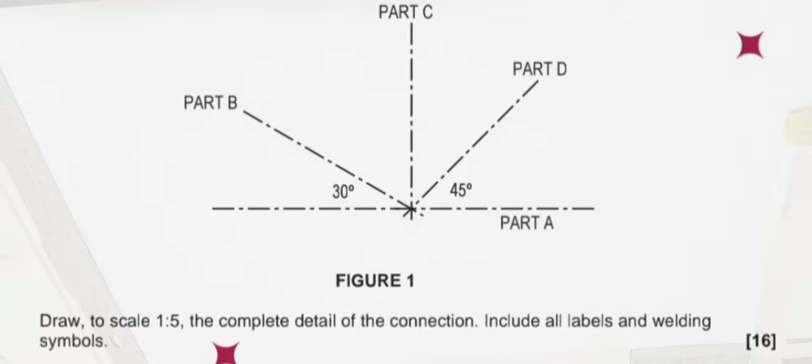So for part C, we have 70 by 70 by 8 rolled steel angles bolted to a gusset plate using 2 equally spaced M12 bolts. So there is our diagram. It's the diagram given, but then we'll have to copy it first in order for you to draw this question. So below it says draw to scale 1:5 the complete detail of the connection. Then they also said we must include labels and welding symbols.

So in this question, what you can do first is to copy that diagram as given. So let us copy our diagram. You can copy it using center lines, construction lines. So I'll start by drawing, but this line must be faint. Here I'm doing it dark so that it can be visible to you looking at the video. So for the members, they said our part A, meaning we're gonna use this line.

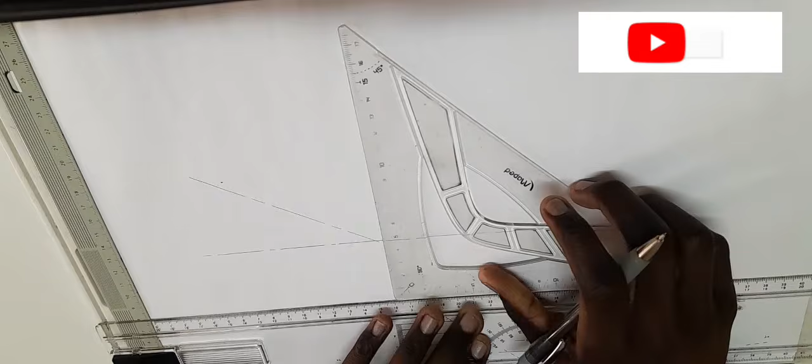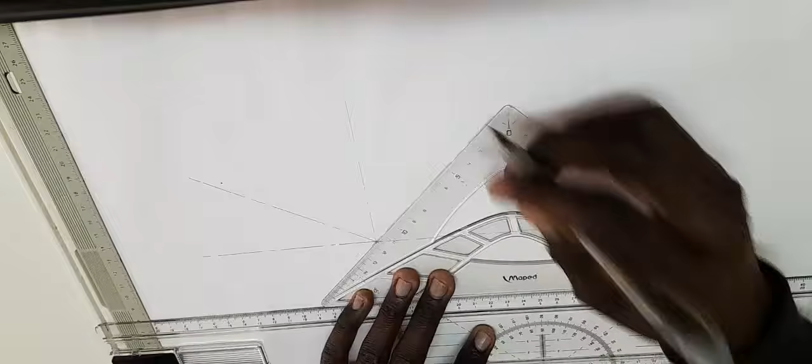So our part B, let's start with part B. They said it's 30 degrees. So take your 30-degree ruler and construct a line like this. Then for part C, it's 90 degrees. You can use a straight line. So for our part D, they said it's 45 degrees. We're going to use 45 degrees. So there we have copied our diagram.

So what will happen? We'll start by doing our part A. This is part A. It's our tie beam. So a tie beam, they said it's 100 by 100 by 10. So don't be confused about these 3 measurements given. You only use 2. Here you're gonna focus on 2 because it's one elevation, it's one view, it's a front view. But on the isometric drawing, that's where you focus on all of the measurements given. I hope you understand.

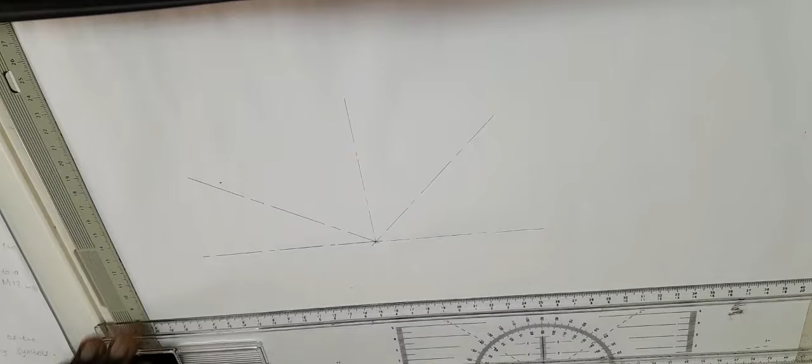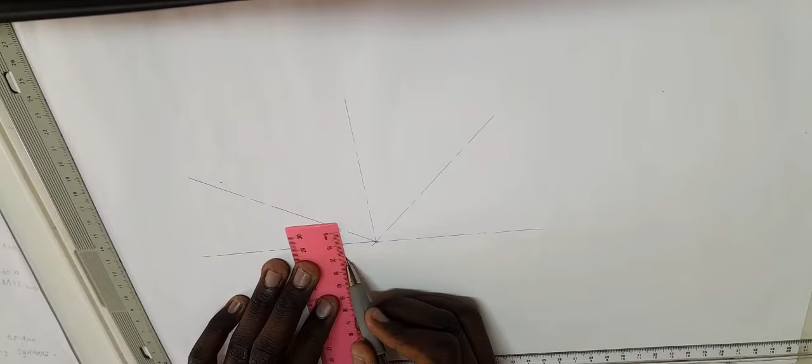So in this case, they said our part A, our tie beam is 100 by 100 by 10. So firstly, we are going to say 100 divided by 5. When you say 100 divided by 5, you get 20. Then after 20, you're going to say 20 divided by 2 because this is center line. 20 divided by 2, which is 10. So you're going to place your ruler here, measure 10 on top, measure 10 bottom. After that, in this case I'll use a different color. Construct a line like this, then come here, the bottom point, construct a line like this.

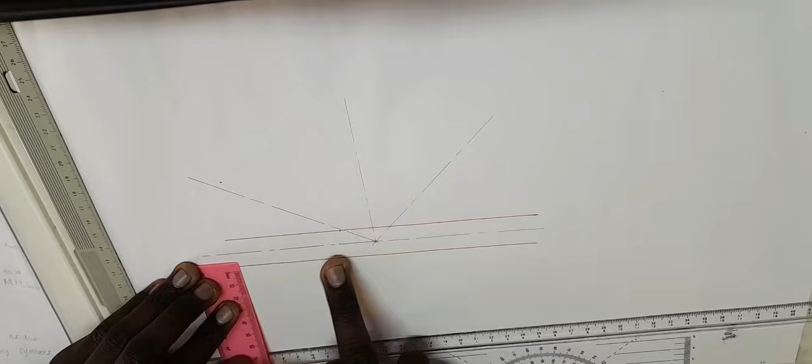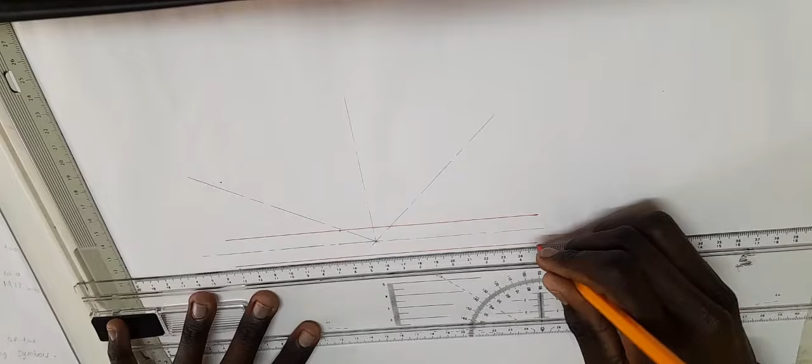Right, then they said it's 100 by 100 by 10. Now for the 10, you're gonna say 10 divided by 5, which is 2. So we're going to come here on this bottom line and measure 2 going down, 1, 2, somewhere here. So point, then after you draw another line, the double line at the bottom. Right, so after doing our part A, we can focus on our part C. You can start by any point or any part, it's up to you.

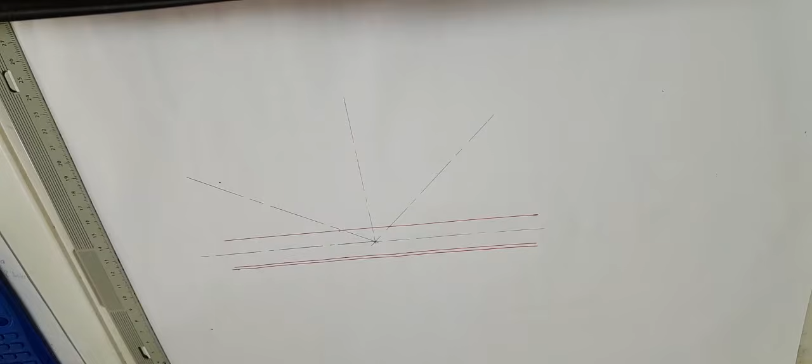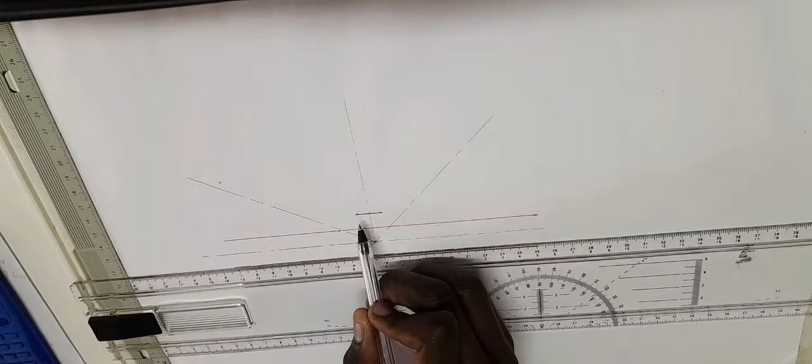So for part C, they said it's 70 by 70 by 8. We're gonna say 70 divided by 5, which is 14. Then 14 divided by 2, which is 7. So I'll come here and measure 7 this side, measure another 7 this other side. Then I'll come here, somewhere here. Then this is my 7 this side, 7 this side. So you construct it, project it to the top, going up. Project this one, project the other point like this.

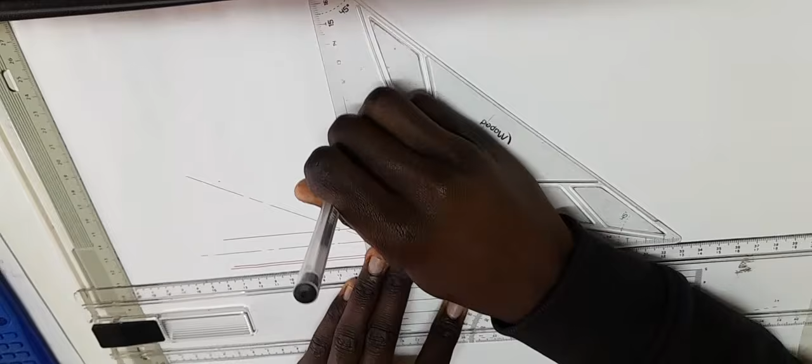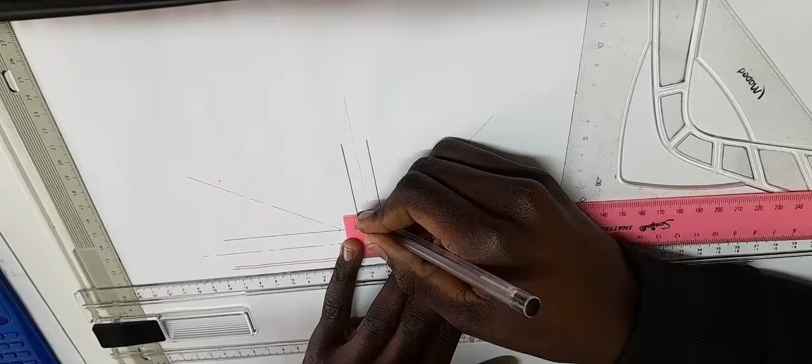They said it's 70 by 70 by 8. So you're gonna say 8 divided by 5. It gives you 1.6, which you can round off, make 2. So you can come this side and measure 2 here. Then again you construct the 2. This is our part C.

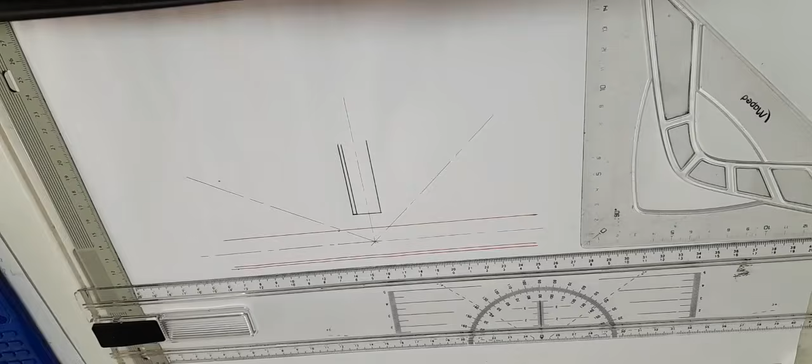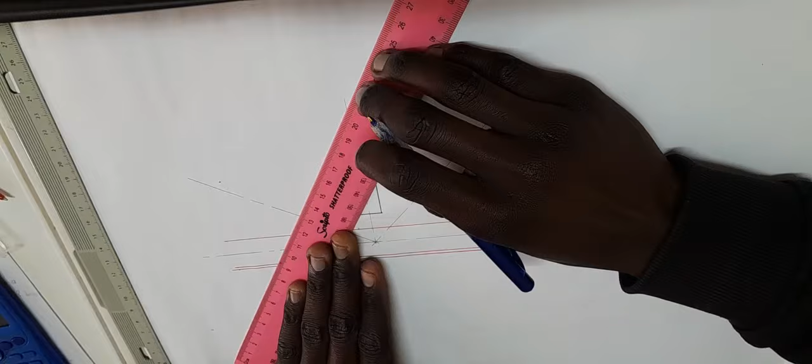For part B, they said it's 60 by 60 by 8. You can start by part B. This is our part B for 30 degrees. So for part B, they said it's 60. So you're going to say 60 divided by 5, 12. 12 divided by 2, which is 6. So I come here and measure 6 this side, again measure 6 the other side. So I'll close it here 60 degrees.

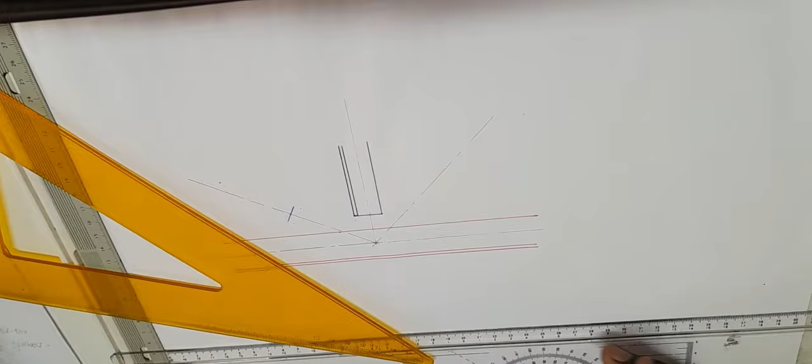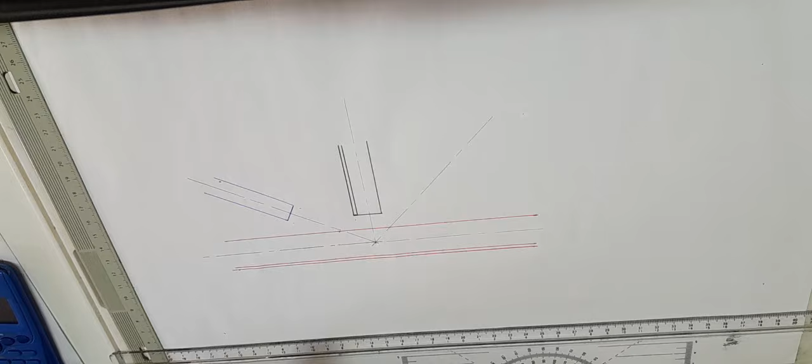Since they said this one is 30 degrees, I use 30 degrees for the points. So they said it's 60 by 60 by 8. When I say 8, again divided by 5, which is 1,6. Then we measure 1,6 here. So let me place my ruler and measure 1,6. You can round it off and measure 2. Still it's fine. 2 here. So here you go, you have

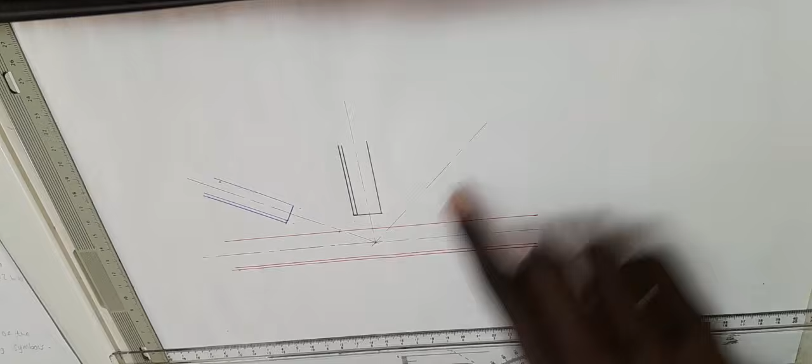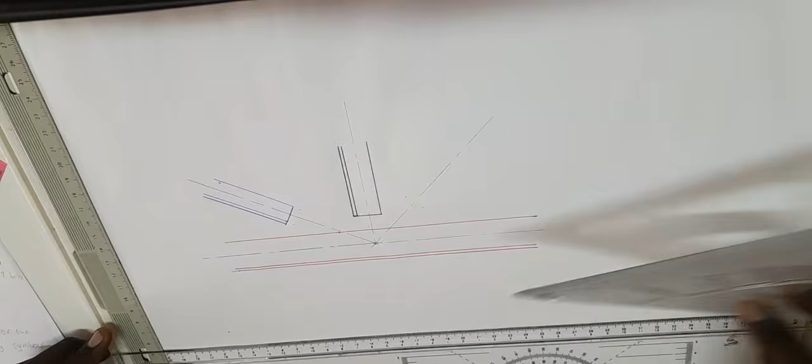part B. So for part D, they said it's 45 degrees. So meaning you're gonna come here again, and they said it's 60 by 60 by 8. So meaning this side you're gonna measure your 6, this side 6. You're gonna see 60 divided by 5, which is 12. 12 divided by 2, which is 6. So I'm gonna come this side and measure 6 and 6 this side. So on this side we will use 45 degrees.

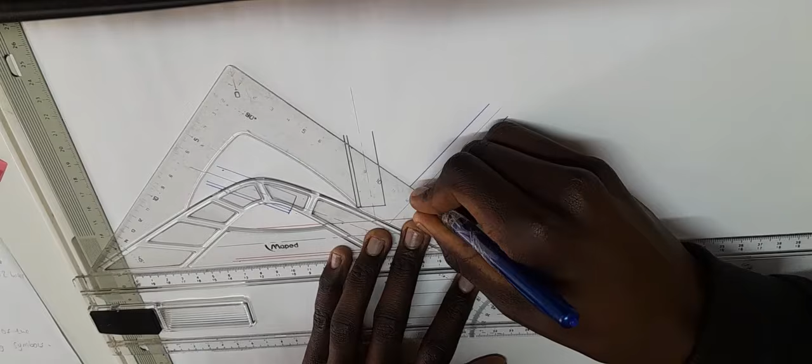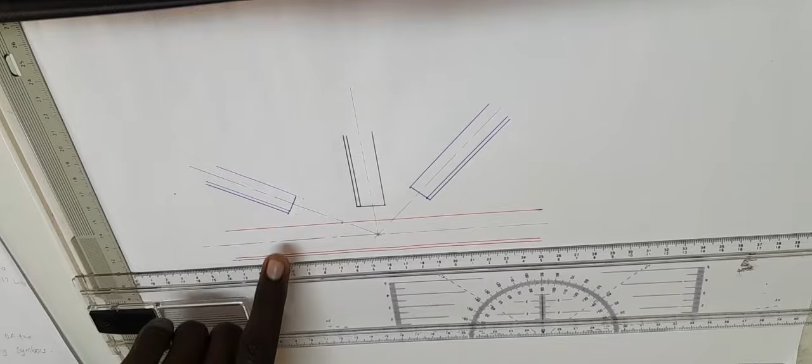So again you measure 2 here, which is here exactly. So I'm gonna do double line this side, and after this video I will draw rolled steel angles so that you can see why it has 2 lines one side. I'll show you why. I will draw this thing with a pictorial view or isometric view so that you can see why it looks like this. So here, come here and do your cracking lines to show that this member is still continuing.

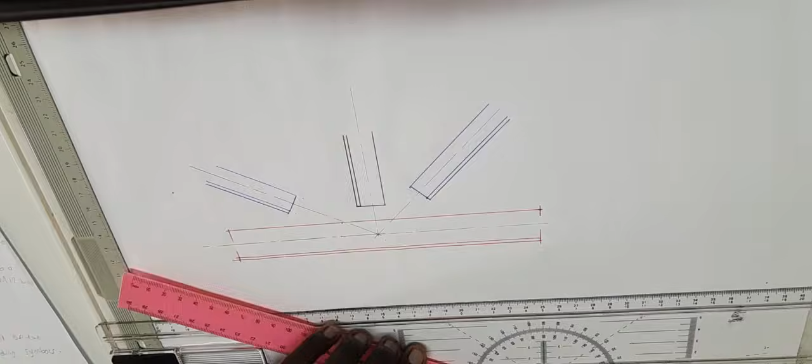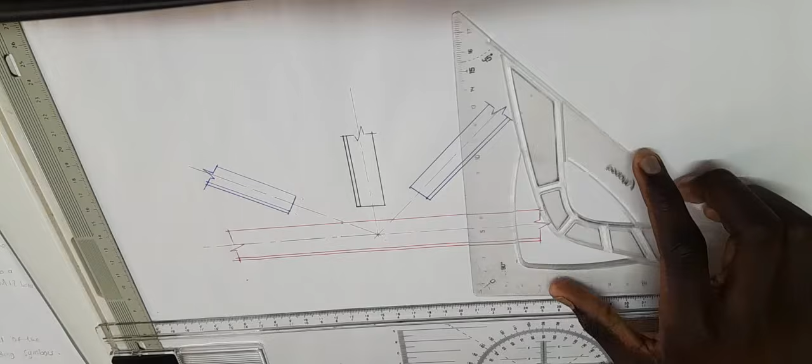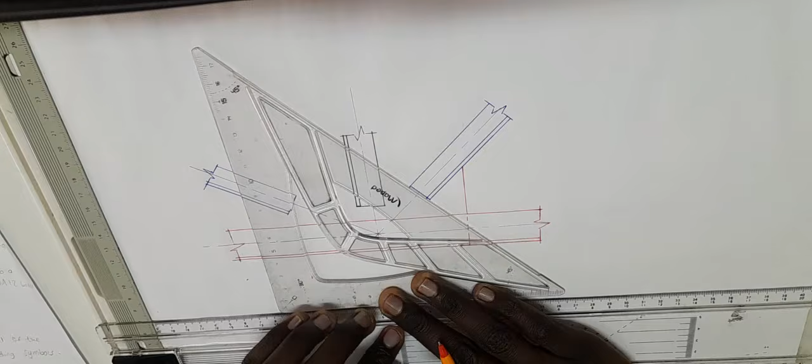Right, they said our part A, it's bolted to the gusset plate using 3 equally spaced M16 bolts. So from here, let us draw firstly our gusset plate. So for our gusset plate, we'll come here and draw a line, straight line. But then here we're going to do hidden detail to show that it is behind. Then you can come here, somewhere here, draw a straight line. Again, hidden details going down to show that it is behind. So again, you can come here and draw hidden detail.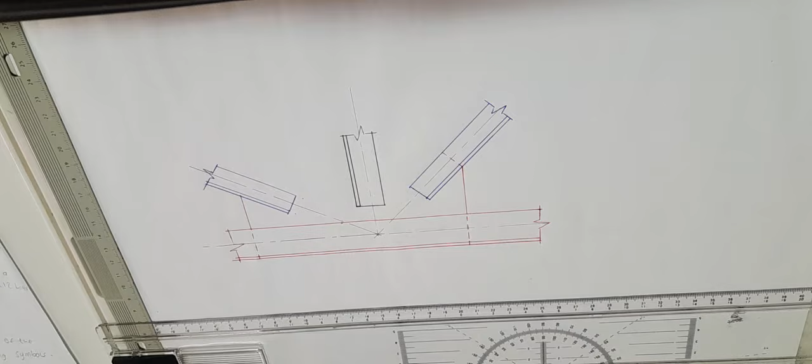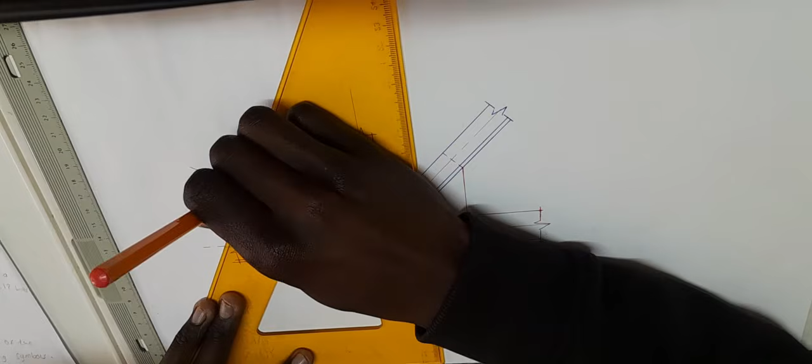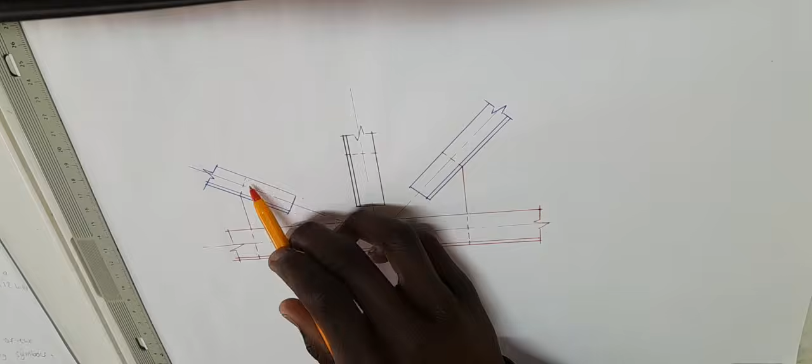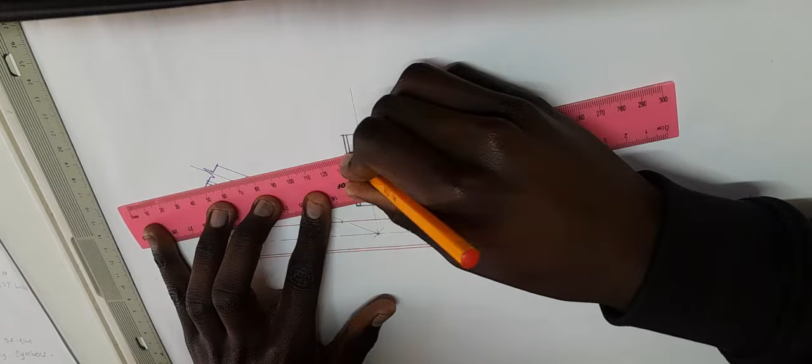Then I'm gonna change my ruler, use 60 now. Remember, I'm doing my gusset plate. Do hidden detail. Then after, come here, somewhere at the top, somewhere here. Remember, this one ends here, so you're gonna shift it a little bit to the top. Then you do hidden detail. So if you can check, you have this point and this point, this point and this point. So you can just join them using a straight ruler. So remember, the shape of a gusset plate doesn't matter, as long as the gusset plate connects all the members. Here is your gusset plate.

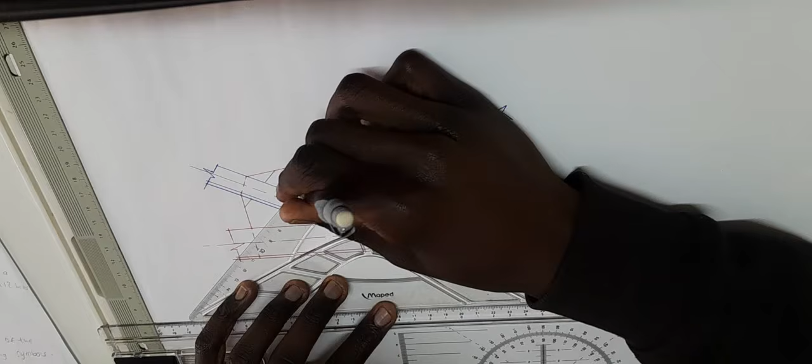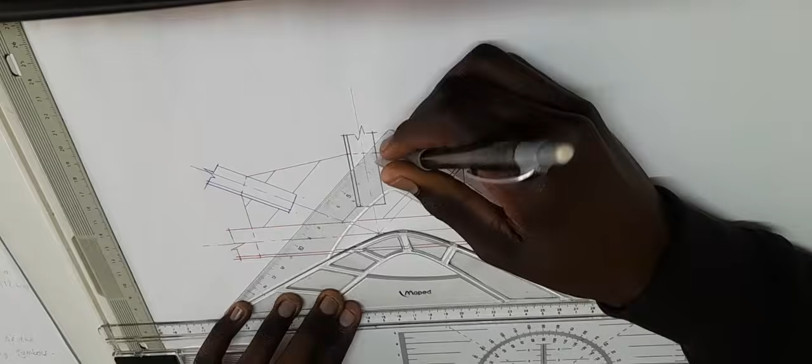So for the gusset plate, just because it's steel, you have to section it using a 45-degree ruler. You can section the gusset plate using a 45-degree ruler. Come here. So the spacing must be almost equal. Spacing of your hatching must be almost equal. Space from here to here, from here to there, must be almost equal. Yeah, here's my section.

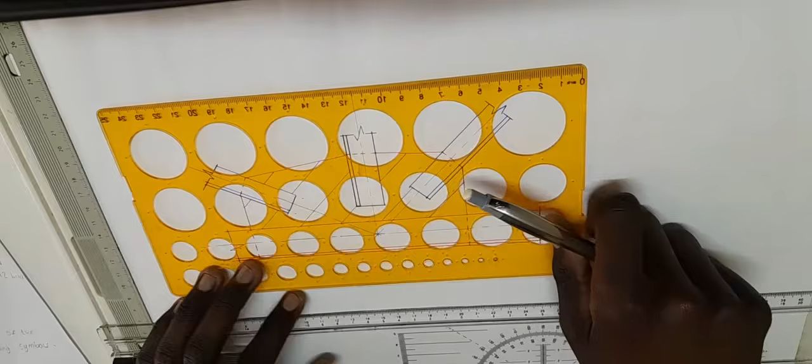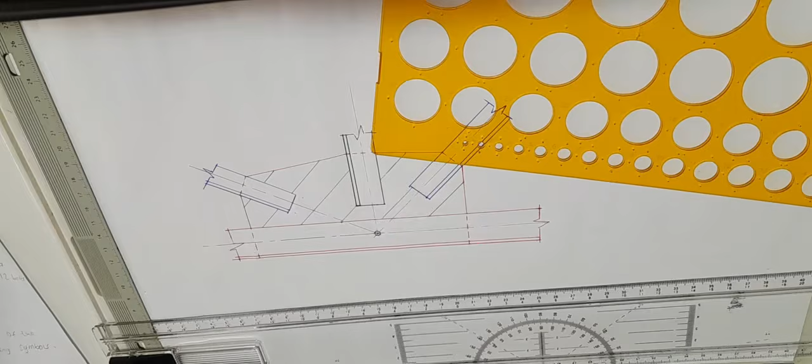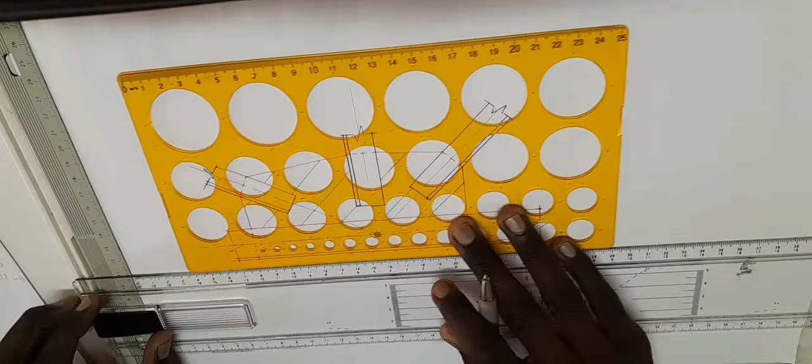So they said it has M16 bolts. So you're gonna see 16 divided by 5, which is 3,2. So meaning for the radius stencil, you can use circle number 3. Place this thing somewhere here and draw a circle. I used circle number 3. So they said the spacing is equal, so you can come this side. From the center of this first circle, measure 30. Even this side from the center of the circle, I'll measure 30. So these points will be the centers of my other circles. Somewhere here, I'm gonna use number 3. Circle here, come this side, circle here.

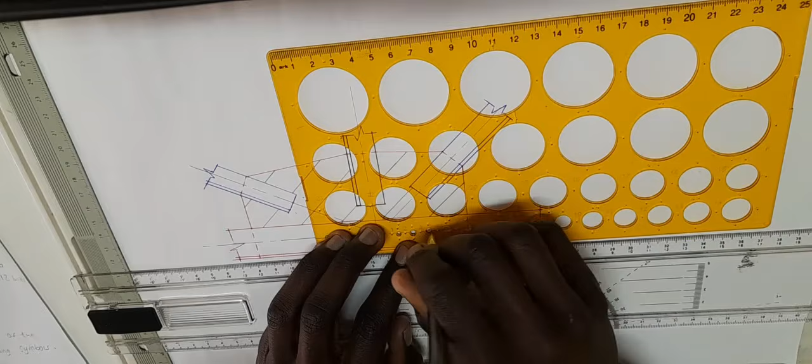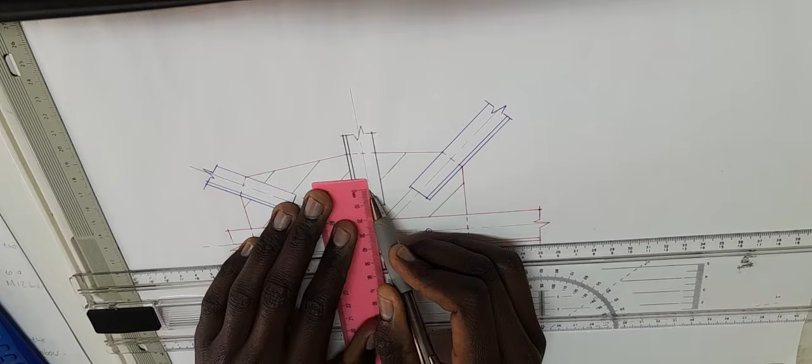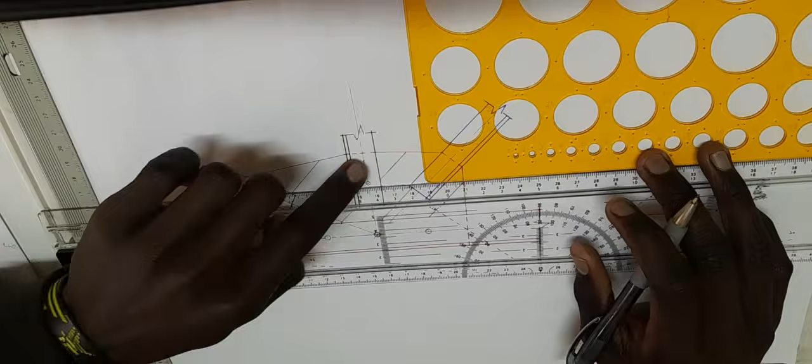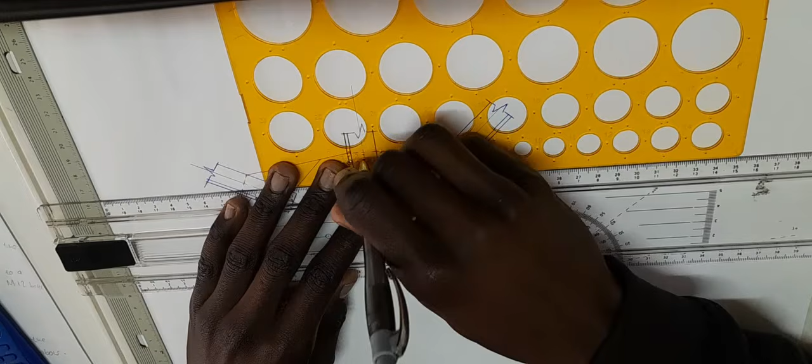So even part C, this is our part C, they said it has M12 bolts. So you're gonna say 12 divided by 5, which is 2,4. So meaning here you can use circle number 2. They are not equal. So from the edge to here, let me measure 15. But from here to here, still can measure 15. It fits. So this point will be my center point for the other circle. Circle here, shift it to the second point. Remember, your circle stencil or radius stencil must be level. Here you go.

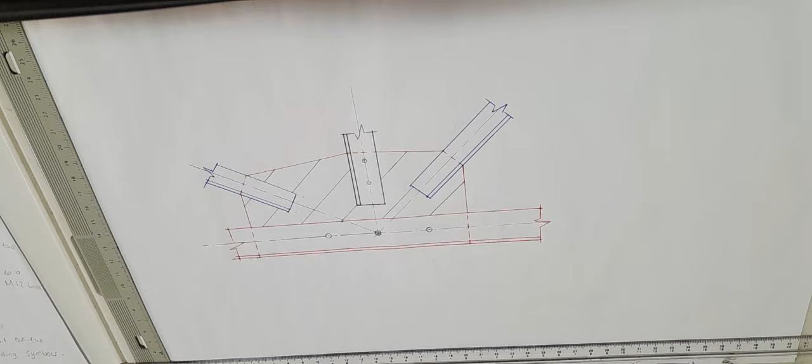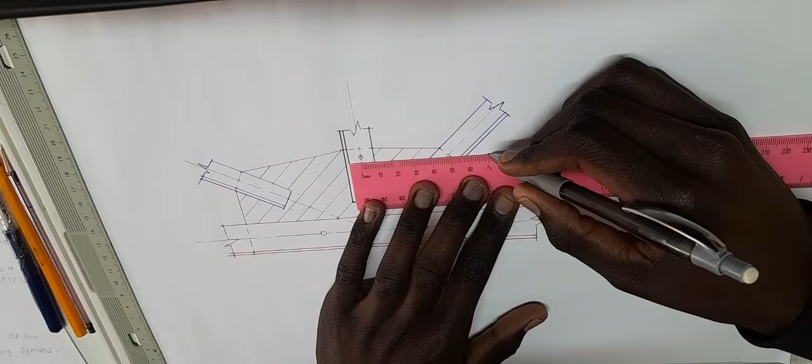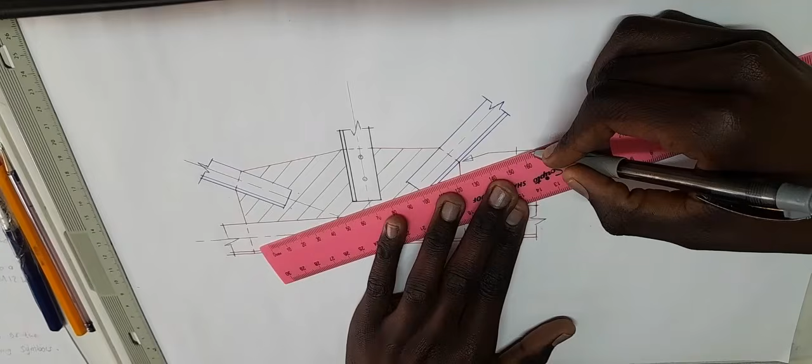Then what's left is to show welding labels, which I'm going to do here, because they said these things are welded to the gusset plate. Remember, in a steel roof, these members don't touch each other, they are not in contact, unlike when we draw a timber roof. I hope you understand. So here I'm going to do my welding symbols, then I will quickly label this whole drawing. Right, I'm going to put my first welding symbol here. Then I'll also share with you the welding notes, and explain what a welding fillet is. So this one here, just shade it. And this other one, you leave it as it is. So here you'll write 8 because they said it's 8 millimeters fillet.